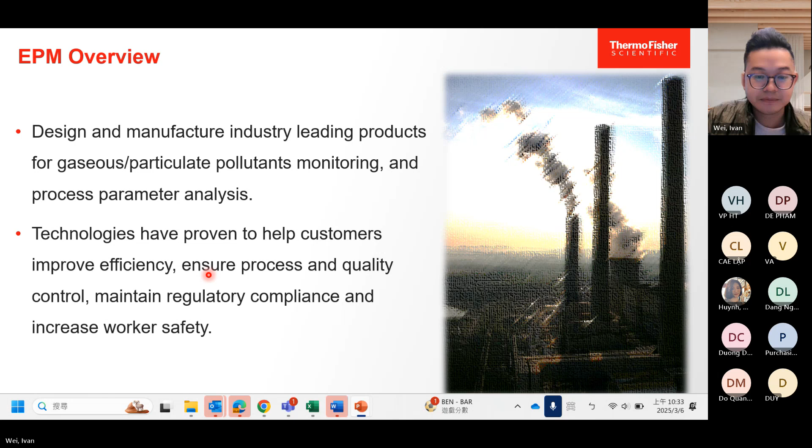There are several different factories that we can order our analyzers from. The main factory is Franklin and China. That's where we usually import our gas analyzers from.

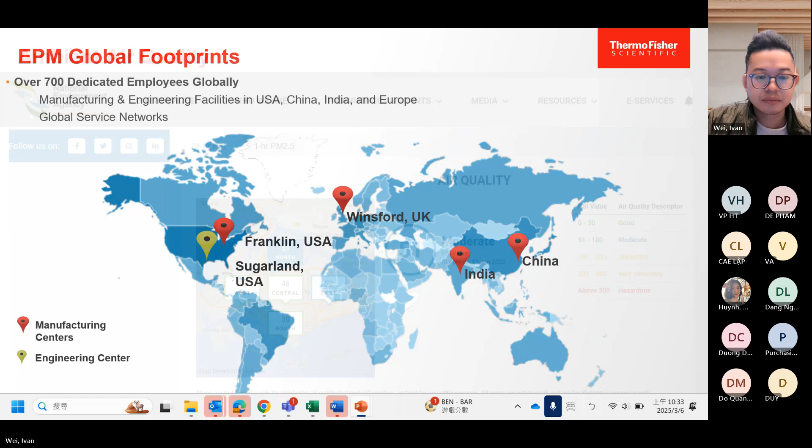So when we talk about ambient air quality, that involves many other factors or elements in the monitoring scope. That includes the gases: CO, CO2, methane, ozone, SOx, NOx. Those are the standard compounds that we need to measure. Other than the gases, there's another part called particulate matter. That's having a lot of issues recently; say, PM2.5 can reduce the lifespan of humans or cause health effects. We're gonna cover that in the next training session on particulate matter monitoring. Today, we're gonna just talk about the gas.

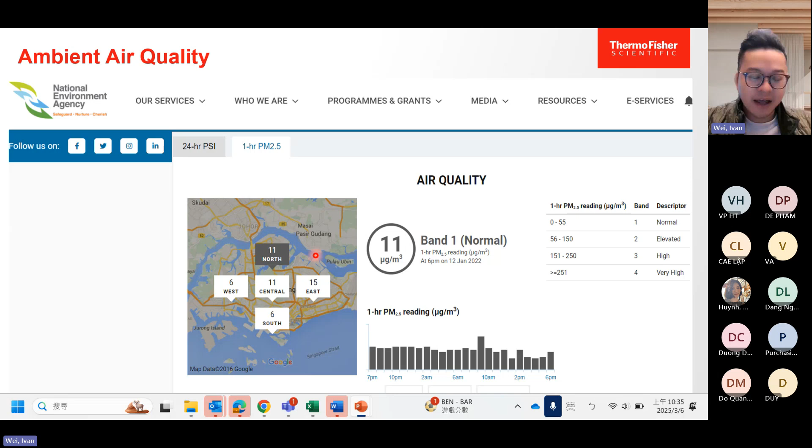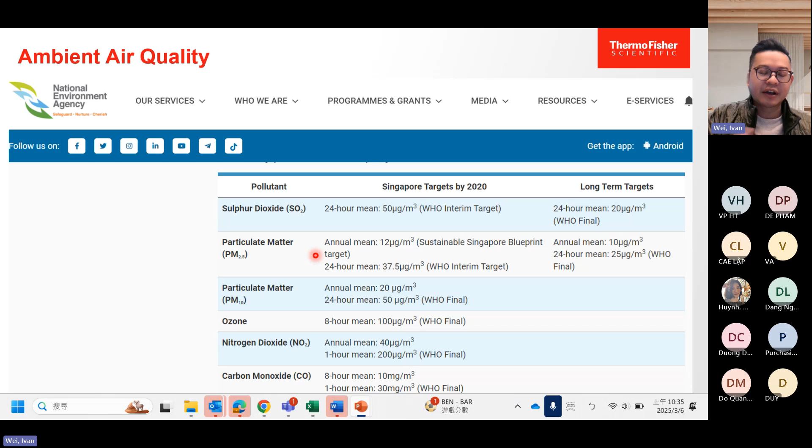As you can see, if you go online to a lot of ambient monitoring websites, or maybe the National Environment Agency, they have all that information listed out. So we're able to know what the air quality is. Is it safe to go outside? Are any hazardous issues occurring in our air? Our analyzer is able to produce that data for customers or the general public to know if there are any hazardous threats in the environment.

As I mentioned earlier, in the United States and a lot of countries, I believe Vietnam has those regulations. They are called National Ambient Air Quality Standards, which have six principal pollutants, so-called criteria pollutants: carbon monoxide, SO2, NO2 or NOx, ozone (O3), particulate matter (PM2.5 and PM10), and lead. We're gonna cover those in different training sessions.

This is a great way to approach your customers. You can tell them, hey, these compounds right here can cause threats and health concerns. All of them need to be measured. All of this needs to be focused on.

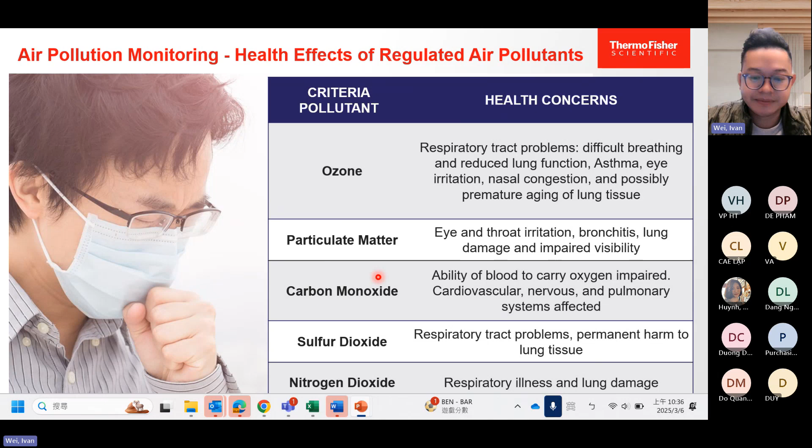So for applications, how do we approach the customer? How do we sell our analyzers, to what industry or what applications? First, the most common one is called AQMS, Air Quality Monitoring Stations. A lot of government agencies want to set up stations in different provinces or industrial parks to monitor pollutants emitted from the industrial park, residential areas, or city downtowns where a lot of scooters and traffic can cause air pollution.

Other than that, in the private sector, there is some heavy industry that might need to focus on source emissions, such as power generation: coal-fired power plants, natural gas-fired power plants; petrochemicals like refineries, chemical production sites, plastic production sites. Also paper mills and other heavy industry that might emit CO2 or CO. Those are great places to sell our solution. Also cement factories, the cement industry.

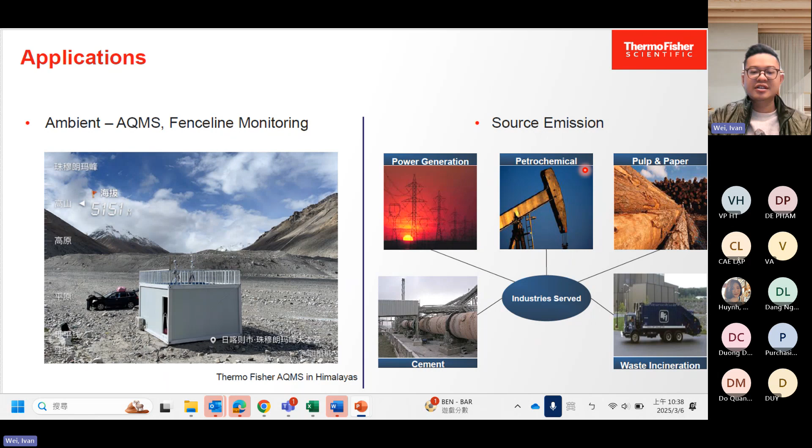So these are some photos of an AQMS site. The setup is quite similar to our CEMS systems. So back to what I was talking about: here, we call our applications AQMS, Air Quality Monitoring Stations. And here, for source emissions, we call it CEMS, Continuous Emissions Monitoring Systems. So all of those stations are equipped with the same analyzers that we produce or promote.

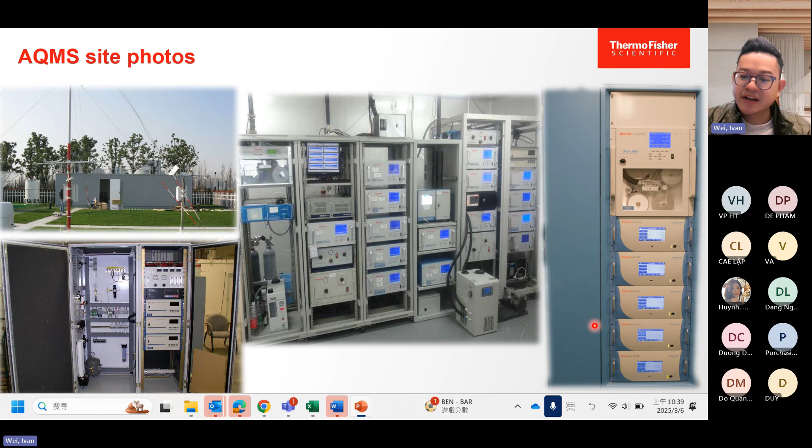So when customers come to us and say, hey, why do we choose Thermo Fisher? Thermo Fisher first invented the chemiluminescence analyzers, focused on NOx analysis. So when the US EPA designed these regulations, we were actually the first to comply with this law, because we were the first inventors of the solution that fits this method or technology. So the solution has been out in the world for a long time, since the 1970s.

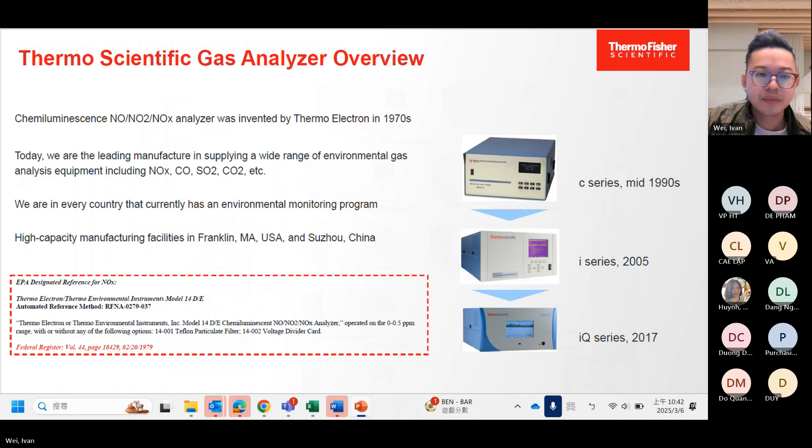We do have other necessary accessories that need to be incorporated in this CEMS system, called multi-gas calibrators and zero gas suppliers. So later in the slides, I will tell you guys what the technology behind the gas analyzers is, and what the purpose of using the multi-gas calibrator or zero gas supplier is.

Other than that, we can also set up a PM10 or PM2.5 monitor with this CEMS monitoring system. Of course, the layout or the inlet port will be designed differently, but they can all be combined together to become a CEMS solution or AQMS solution.

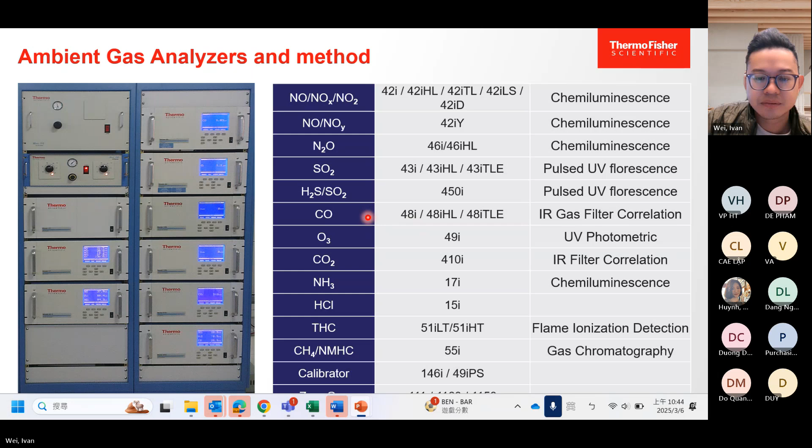So about 10 years ago, sorry, in 2017, we upgraded from our previous generation, the i Series, to our iQ Series. Later, I'm gonna tell you what the differences are and do a really quick comparison. But right now, we are still able to provide both the i Series and the iQ Series.

The i Series is well known. We still have a lot of users, so we cannot obsolete this generation right away. But our newer generation, iQ, is on the market, and we're still able to promote both, depending on the functions or on how the customer chooses their analyzers.

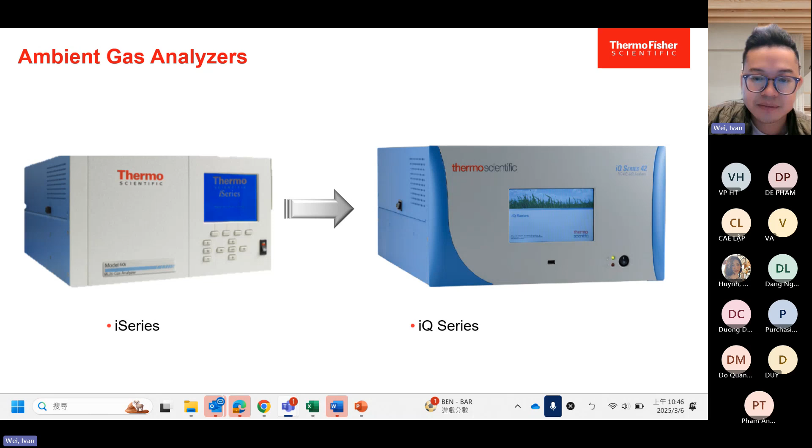I'm gonna show a quick launch video for our iQ Series. Please take a look.

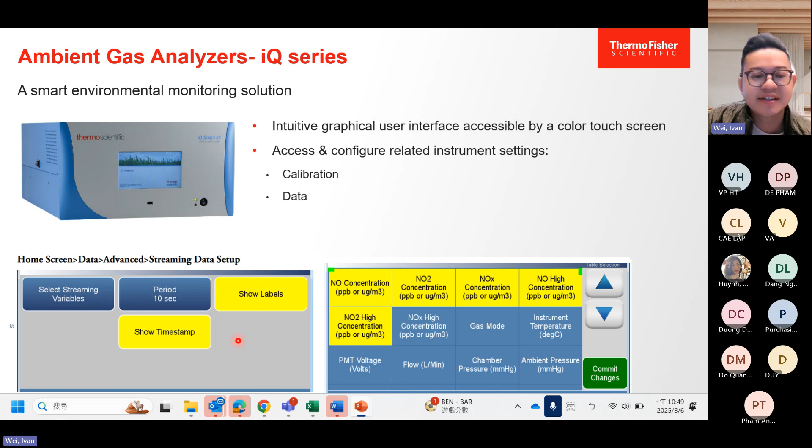As you can see here, you're able to see the trend charts. You're able to see the different concentrations at different moments. All of this can be done through these touch panels. So it's easy to access. It's so intuitive. It's user friendly.

Other than the older generation, the new generation iQ series has a predictive diagnostic function to let the end user know when they need to do maintenance, the lifetime or lifespan of any particular consumable that needs to be changed. They can send out email to alarm the user, say, hey, something is going on. We need to do a quick diagnostic. We need to swap certain parts in our systems.

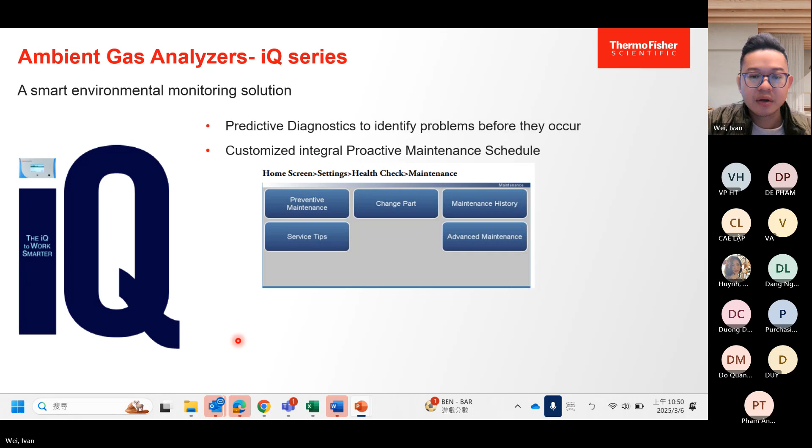Also, it has remote control abilities so you can use our app to know what the readings are now. So the engineers don't have to go on site. They don't have to go to the AQM stations. They can just pull up their smartphone and check what's going on with the analyzers, what are the readings, what is the concentration right now at this moment.

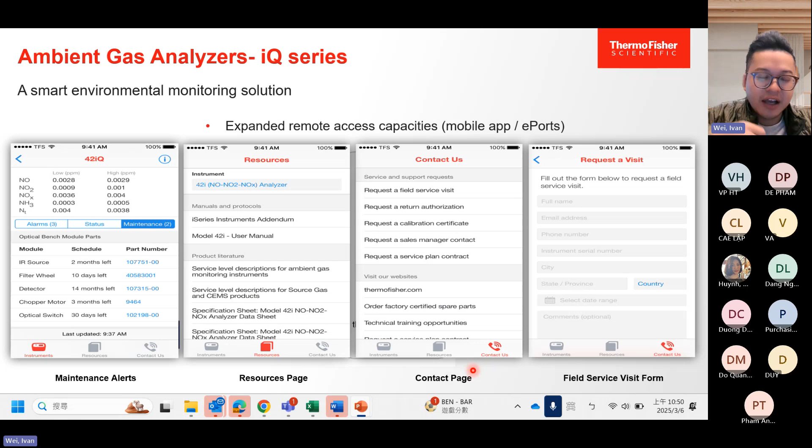You can see there's a maintenance alert, resource page, contact page. They can use their phone to reach out or send requests to our Thermo Fisher engineers or Thermo Fisher customer service sites. They are able to send out help or send out any troubleshooting materials to the end user.

The newer iQ series has 4 USB ports. The customer can use their USB thumb drives to download their data log or to do firmware upgrades using this USB port. It has Ethernet that is able to upload the data through Modbus systems, so it can be 24 hours, 7 days, 365 days of data submitted to their central systems.

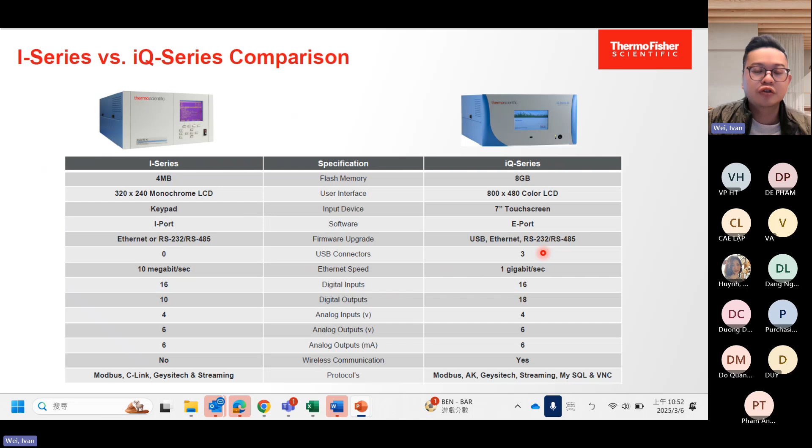There are more firmware upgrades. There are USB connectors; compared to the old one, they have none, so they have to use Ethernet or other cables to download their data. The speed for transferring data is much faster. The rest of it kind of stays the same. But one thing I want to point out is the capability to use your smartphone to check your instruments remotely.

So I just finished the quick configuration, comparison, or overview of our gas analyzers. Right now, I'm going to go into the concept or methods of how we detect the gases in different gas analyzers. So first, we do have a 17i. The 17i is for ammonia gas analysis.

Typically, you will see this in incinerators or other gas manufacturing sites where they produce ammonia as a product, such as Air Products, Air Liquide, etc. Other than that, probably CEMS, continuous emission monitoring, might use this. Depends on what the customer is looking for. If they are using ammonia gas analyzers, the 17i is our go-to. They can measure from sub-ppb levels up to 100 ppm.

They are using the same technology, same methods as the way we detect NOx. So it's all chemiluminescence technology. So for the operation principles, they have 3 modes. One is NO mode, meaning nitrogen monoxide mode. Second mode is NOx mode. Third one is Nt. That means we convert ammonia into NO.

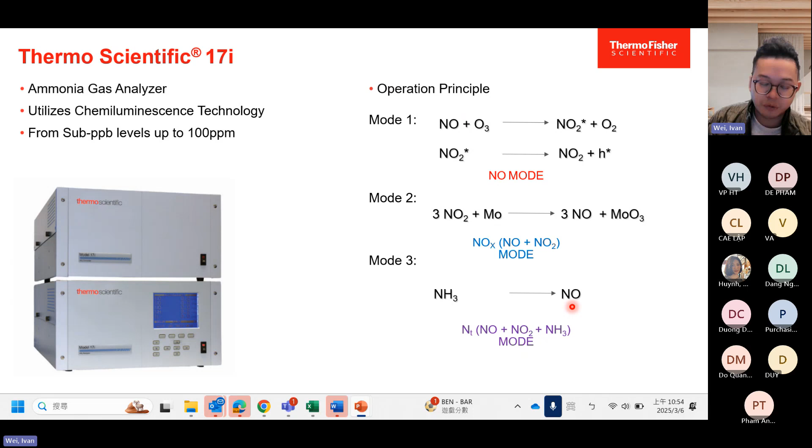The second analyzers I constantly mention throughout the presentation are the NOx analyzers. This can be used for NO, NO2, and NOx. Of course, with different configurations, we're able to measure from sub-ppb levels up to 100 ppm levels or even higher. So as you can see here, same as our 17i, there's NO mode and NOx mode.

So nitric oxide NO and ozone can react to produce a characteristic luminescence with an intensity linearly proportional to the concentration. The infrared light emission results when electronically excited NO2 molecules decay. So we are using the decay of the electrons and the intensity of the luminescence, and we're able to convert these signals into concentrations.

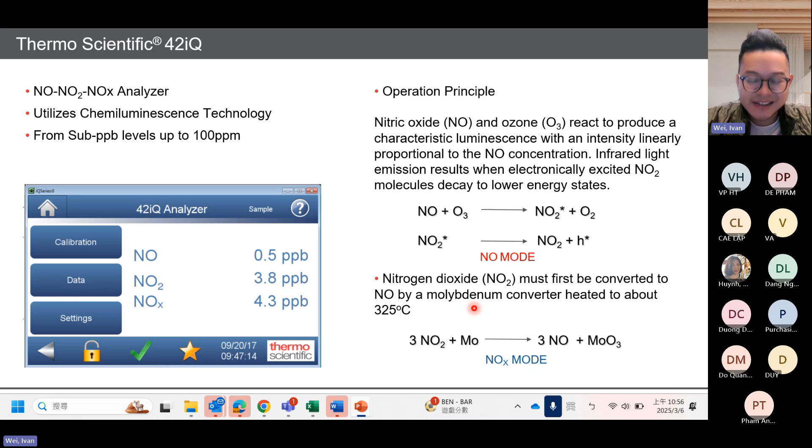Okay. For nitrogen dioxide, how do we do it? We must convert this into NO by molybdenum. This is a material that is able to heat up, I think, to about 325 degrees, that will convert our nitrogen dioxide into nitrogen monoxide, and then we use nitrogen monoxide luminescence to detect the concentration.

So when we take in the samples from the atmosphere, the sample will go into these capillaries. So small trace amounts of gases will go in here, depending on how we set up our analyzers. If we want to measure NO, it will be bypassed into this chamber. We are able to generate ozone to react with this NO, so the NO lights up, and then we use our detectors to detect the difference in proportion to our NO concentration.

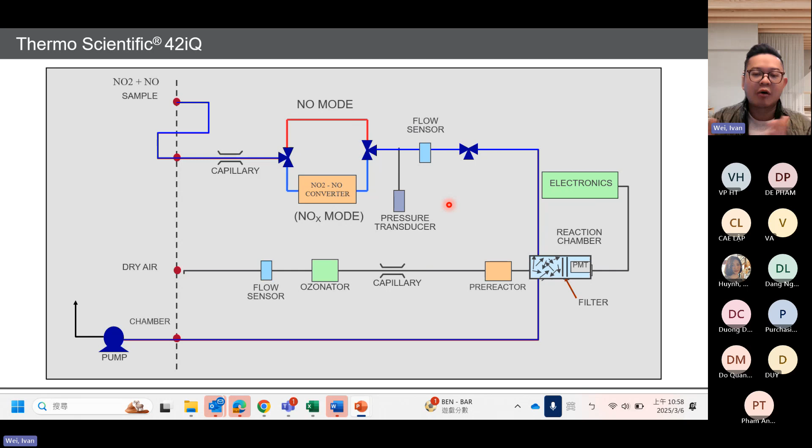On the other hand, if we want to do NOx mode, that means we introduce all the gases together. The NO2 and NO will all convert into NO, and then we use a similar way to do the analysis, and then we subtract out the NO. Then we will know how much is NO2 and how much is NO. So that's how we do the NO2, NO, and NOx readings. NOx means we add the NO2 and NO together. That will become our NOx reading from the atmosphere.

Other analyzers that are able to do SOx are our 43i or the 43iQ. Again, they are using light technology. We excite the SO2 in the sample gases. The SO2 molecules absorb UV light and become excited at one wavelength. After they are excited, they decay to a lower energy state and emit UV light at a different wavelength. Then we calculate the amount of signal and convert it into a concentration. Again, this analyzer is able to measure from sub-ppb levels all the way to ppm levels.

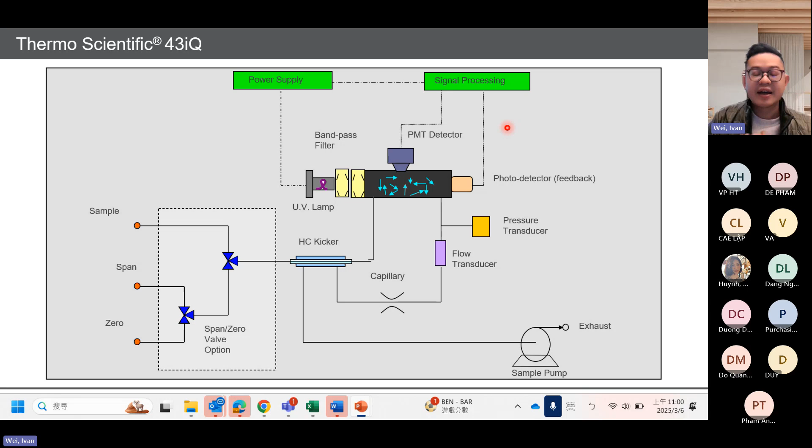As you can see here, our sample is coming into our analyzer. It has what's called an HC kicker. This is a mechanism that is able to absorb the total hydrocarbons. So all the THC will be absorbed in this hydrocarbon kicker, and the remaining will be the SOx and the SO2. The SO2 will go into these chambers, we emit UV light to excite our SO2, and then the signal processor calculates the difference, and we will know the concentration of our SO2.

We have this analyzer called the 450i, similar to our 43i. The only difference is that it's capable of measuring H2S. They use the same technology and can measure from sub-ppb levels to 100 ppm levels. Inside the 450i or 450iQ, there is a converter or catalyst that converts our H2S into SO2. Then we measure the SO2 similar to our 43i. We shine a UV light and excite the SO2, it emits UV light at a different wavelength, and our analyzer does the whole SO2 or H2S calculation.

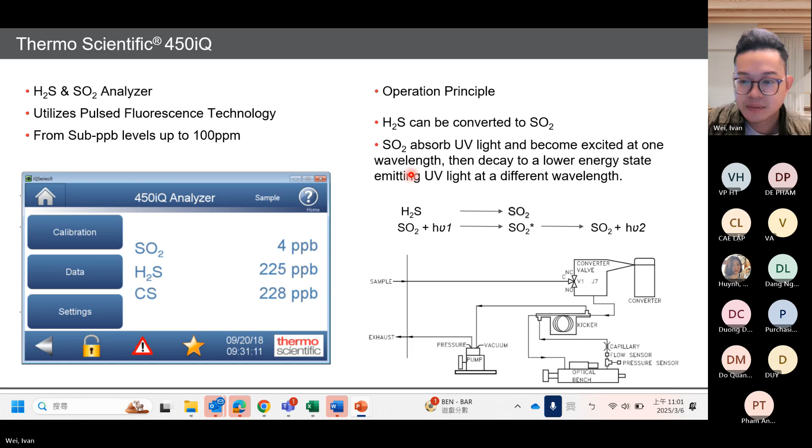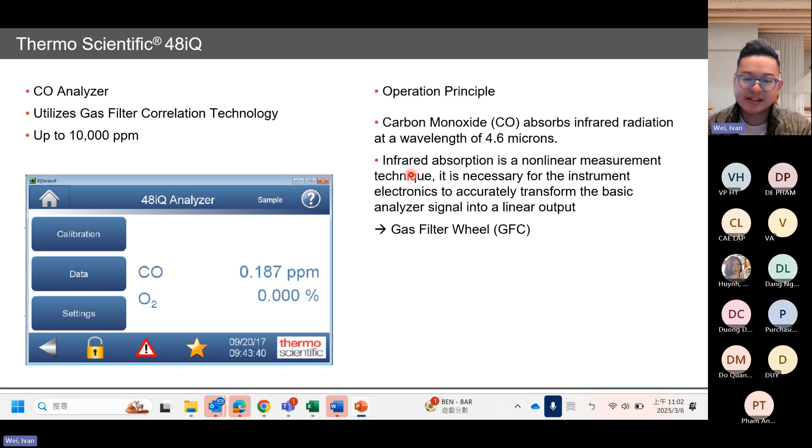Next, we have our 48iQ. This is our CO analyzer. The technology behind this is gas filter correlation. We can go from sub-ppb levels all the way to percentage levels. We use gas filter correlation because carbon monoxide absorbs infrared radiation at 4.6 microns, and infrared absorbance is a nonlinear measurement technique, so we know the concentration versus signal intensity. Inside this analyzer, we have what's called gas filter wheels, GFCs. I will show you the concept behind this technology in the next slide.

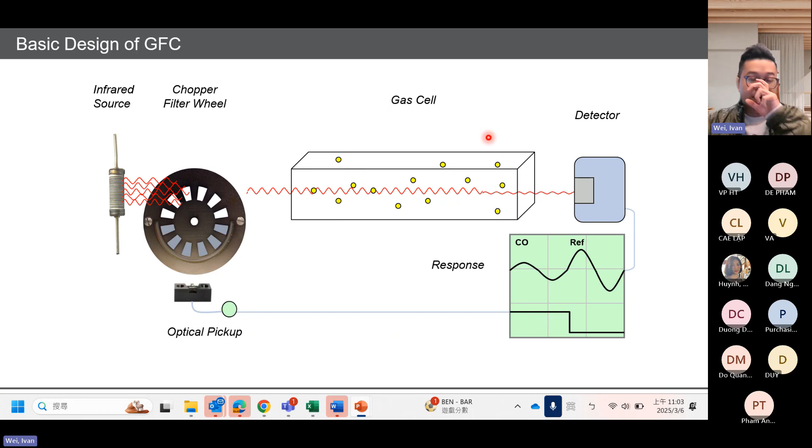When we flip this chopper filter wheel around where it's filled with CO, all the infrared will be absorbed, and none of the IR light will go through this filter wheel. So when these detectors read the signals, that will become zero because the IR light is absorbed. So we can take the difference between the nitrogen chopper filter wheel and the CO chopper filter wheel, and we will know the concentration of CO gas in the gas cell. We will use this intensity to do our calculation to convert into concentrations.

So this is the diagram of how we do the sampling. Sample will go through here and then go to this permeation dryer into this gas cell. The chopper, the CFW, is here. IR light will shine through here into our gas cell, and then we will switch the mechanism to change from nitrogen, where the IR will not be absorbed and goes through the system, or we can switch back to CO where all the IR is absorbed here, and calculate the difference. The detectors absorb the signals, and then we can calculate our CO concentration.

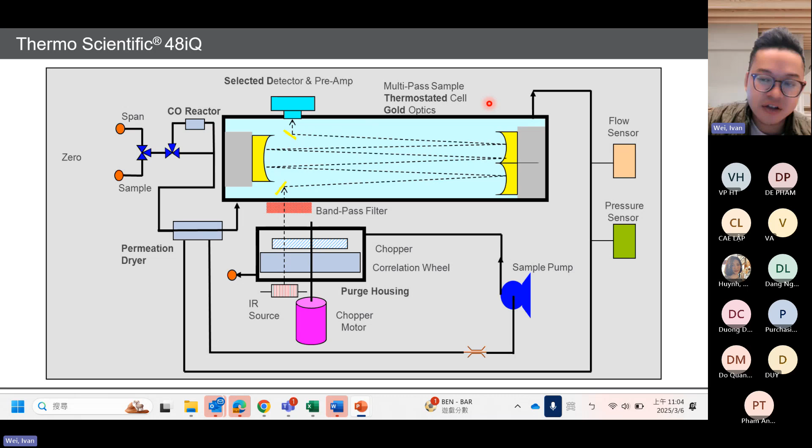Again, for CO2, similar technology as our CO. We're using the optical filter technologies because for carbon dioxide the wave number is different. It's at 4.2 micron. So similarly, we just change our IR source to emit 4.2 micron, sorry, the wavelength. And then we have this gas filter wheel to change it around to filter out the zero and hundred of our intensities, and then we can do the calculation using our detectors.

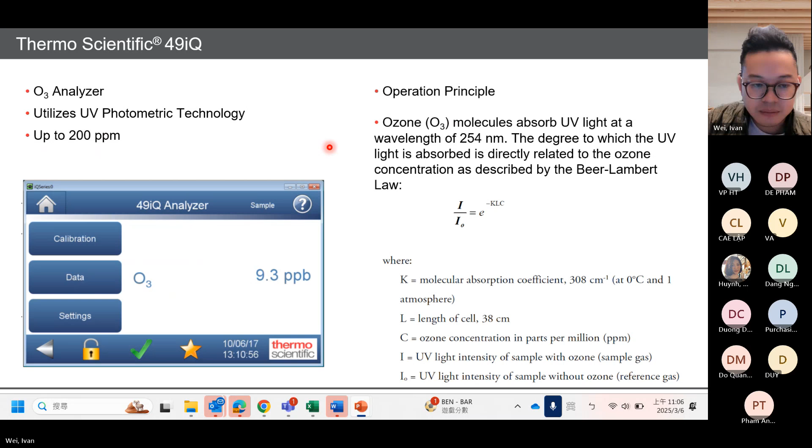The system will alternate around. So we constantly introduce the gas without ozone into one chamber, and sample going to another chamber. We switch it around to have a better ratio, to have better accuracy in how we measure our ozone.

We have other calibrators or zero gas suppliers. The reason we need a calibrator is because we still need to introduce a known concentration into our systems so we can do adjustments and fine tuning. We also choose this because US EPA has a regulation saying you need to have a multi-gas calibrator on site to do a quick QA and QC check to make sure your analyzer is able to produce readings that are correct, with accuracy and also precision.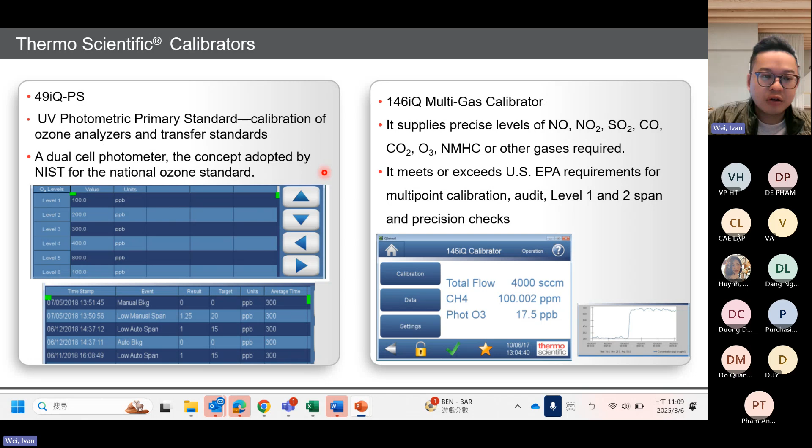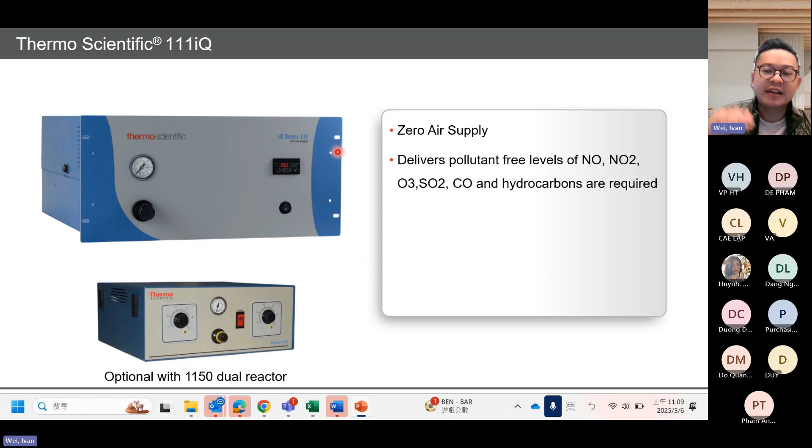We do have one called the 111iQ. This is a zero air supply. So we deliver pollutant-free levels of NO, NO2, ozone, and SOx into our system as we require. So when you propose AQMS stations, a solution proposal to your end users, you not only need to include the gas analyzers, but you also need to have these calibrators on site, and a zero air supplier on site, to make sure all of these analyzers are able to meet the QA and QC procedures.

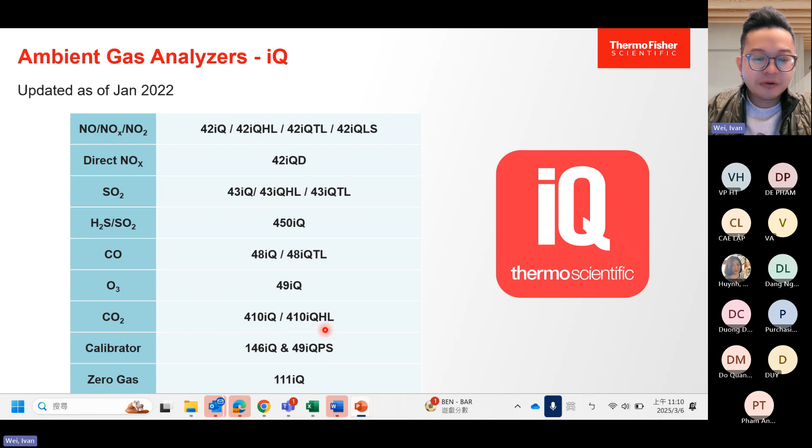So as you can see here, this has been updated as of January 2022. We have our SOx analyzers, NOx analyzers, CO and CO2, ozone, calibrators and gases. As you can see here, we have 42iQ HL. HL means high levels. TL means trace levels. So if the customer is looking at trace level, ppb levels, this is the configuration that you want to propose. When the customer is looking at higher ppm, 100 ppm, 1000 ppm to percentage levels, then we would choose the HL configuration. PS means primary standards. This is for the ozone primary standards that we set up for customers.

So I'm going to do a really quick recap of our gas analyzers. For our IQ series, we can do real-time monitoring. All the information can be uploaded through our user interface, so you can do remote control. It has less troubleshooting time.

All of those analyzers are modularized. If some part is broken, we can simply swap the module out and replace it with a new module, such as motherboard, pump, UV emitting modules, etc. All of this can be swapped easily.

It is easy to operate. Everything has a user interface with touch panels. You can set up all of this directly through the touch panels. It's easy to maintain. Once installed, we can do analysis right away. You don't have to do method development. All of this is preset when we select our configurations.

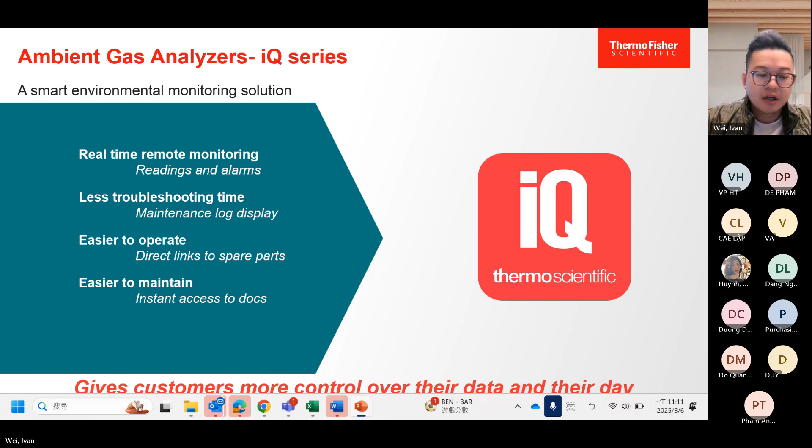So this is our solution to monitoring any ambient pollutants, including SOx, NOx, CO2, and ozone. I want to just give you guys a quick tour of the slide and also our website. Give me a second.

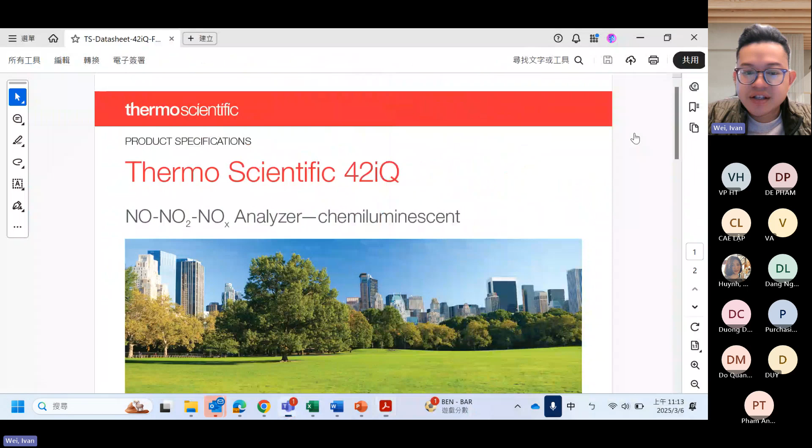So as you can see here, we have this Thermo Scientific 42 IQ. If you scroll down here, this is what configurations we want to discuss with the customers.

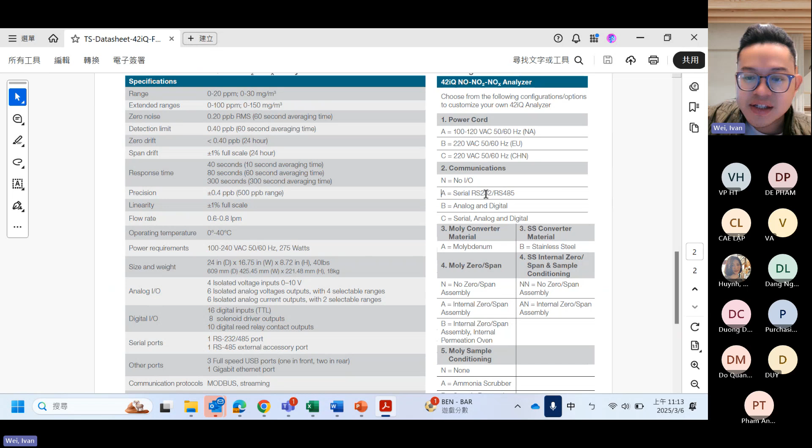If you go to our Thermo Fisher website here, we'll scroll down. It has a specification sheet. When you open it, it will tell you all of the information that we need.

For instance, if we are looking for the 43 IQ sulfur dioxide, how do we order it? We just simply fill up these symbols. What power cord do you need? Does it need communications? Does it need any case configuration? You just simply fill it out.

43 IQ dash B A C or B A D, depending on the configuration. Then this is your configuration for this particular analyzer. When you talk to the customers, you can show them here under our specifications.

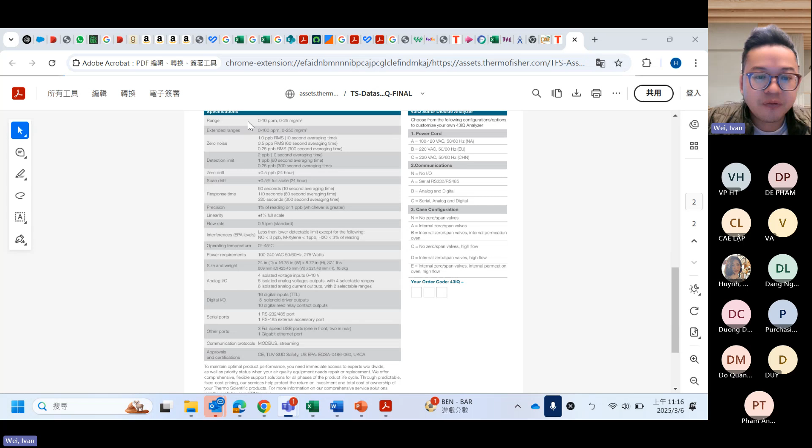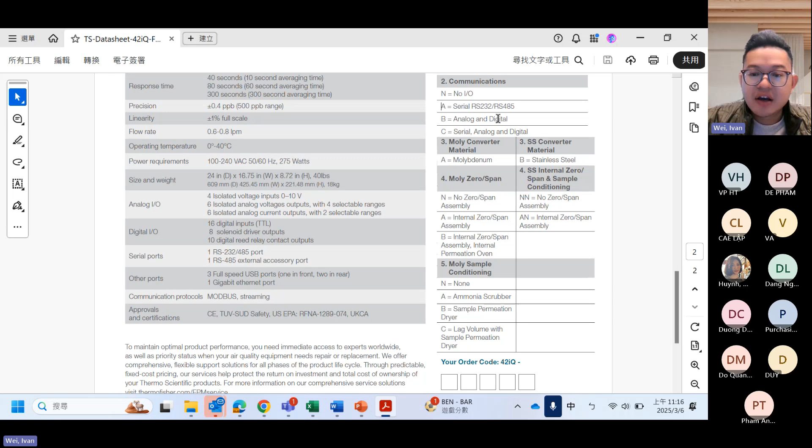Different analyzers will have different ordering codes. So these specification charts, the data sheets, will help guide you to select the right configurations. But if you guys have any questions, feel free to reach out to me. First, I will definitely have you go through this configuration to discuss with the customer, and then we would figure out if this is the reasonable or right configuration for the customer.

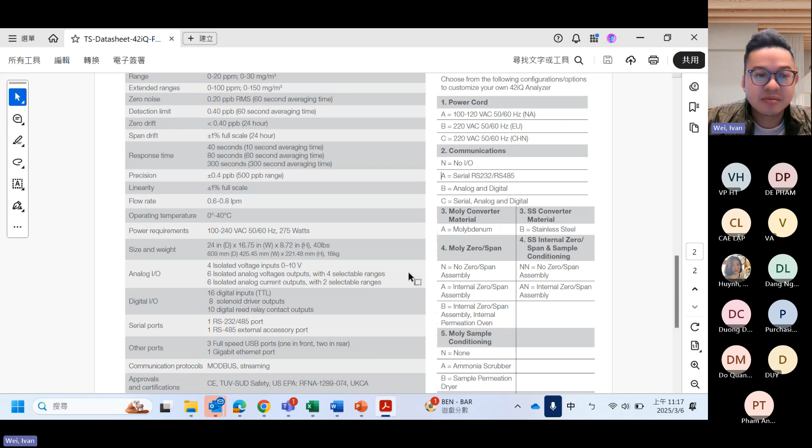Do you guys have any questions regarding the gas analyzers?